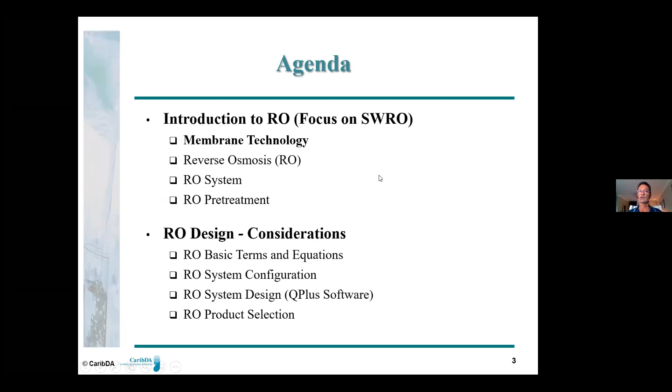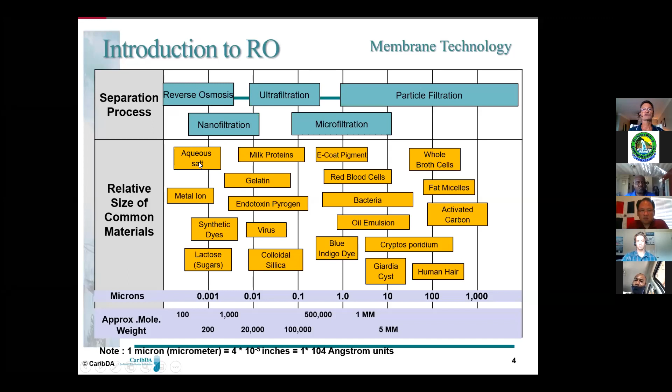This is kind of complicated - I'll just leave it up here for a minute. Not complicated, just has a lot of info on it.

This actually relates to pH. Those of you that run a reverse osmosis system know that your filtered water, called permeate, is low in pH. Part of the reason, I believe, is because carbon dioxide gas passes through the membrane into the permeate water and forms carbonic acid, which makes permeate a little bit acidic. So a lot of governments and users of RO add back some minerals, sometimes calcium or even lime, to raise the pH back up. Some don't, and if you don't, it can be a bit corrosive to your distribution lines.

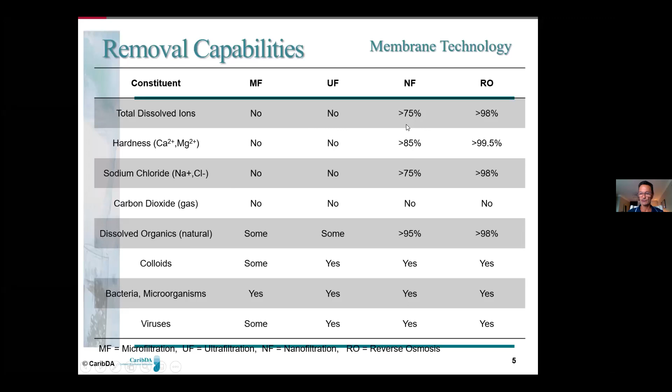Nanofiltration, you don't see a lot. I sometimes hear it called a membrane softener. I do have some customers that have nano in industrial applications. It doesn't take out everything that an RO does, but it takes out a lot of the hardness, a lot of the dissolved solids, and a lot of the salt, the sodium chloride. So it can be used in a lot of applications. It would probably be a bit salty to drink this water, so we're not using it for potable very often, but it has its benefits, and it would use less pressure than an RO.

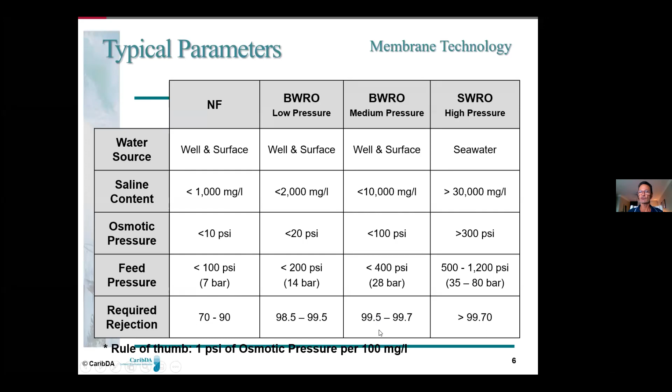As we move up on this scale of higher dissolved solids, we're going to need higher pressure to separate the pure water from the dissolved solids. As a rule of thumb, we need about 1 psi for every 100 milligrams per liter, or parts per million, of dissolved solids. You're going to see that a little more as we go through.

Membranes, you're probably in municipalities, especially in ocean desalination, going to see pretty much the standard membrane, which is 8 inches in diameter and 40 inches long. That's pretty much the standard. There are other sizes out there, but that's what we're going to see in the Caribbean, 8 inches by diameter by 40 inches long. In some smaller applications, primarily industrial, you'll even see 4-inch diameter membranes by 40 inches long, and even 2.5-inch diameter membranes by 40-inch or other lengths. But the standard most of you will see is 8 inches in diameter by 40 inches long.

So what's really going to happen with these membranes installed in our seawater or brackish water RO system: we'll drive feed water through spaces between our membrane sheets, through the spiral, not through the center. The feed water will go right on through and come out as what I called concentrate. But while it's passing through, pure water molecules, H2O molecules, are going to pass through the membrane.

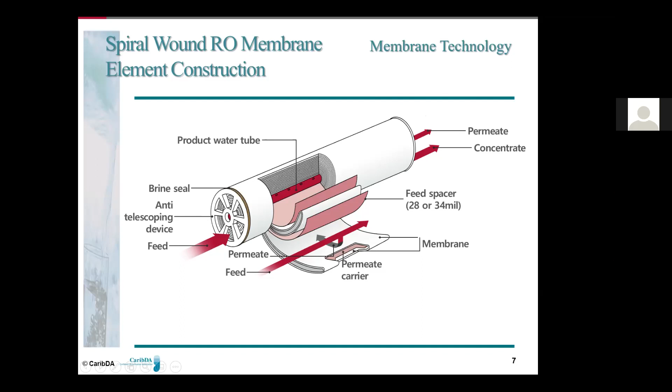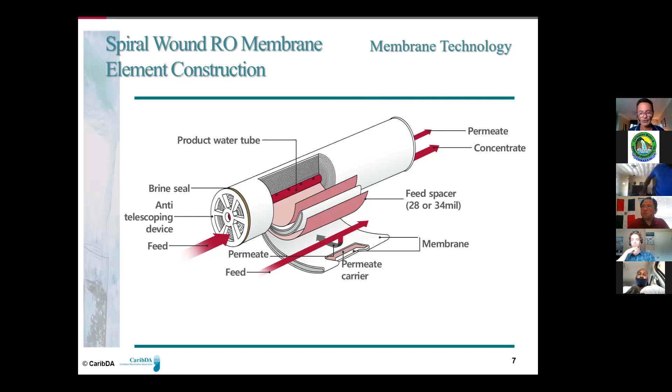Most desal systems for municipal drinking water purposes will have 6 or 7 of these membranes in a pressure vessel. So that last membrane is going to have almost double the dissolved solids of the feed. That's one reason we need higher pressure than the theoretical pressure stated for seawater—because when we get down to that last membrane, we're actually desalinating much higher concentrate water. It might not be totally clear now, but hopefully it becomes clear as we go through the other slides. That's why I said at the get-go, it really pays to see this presentation more than once.

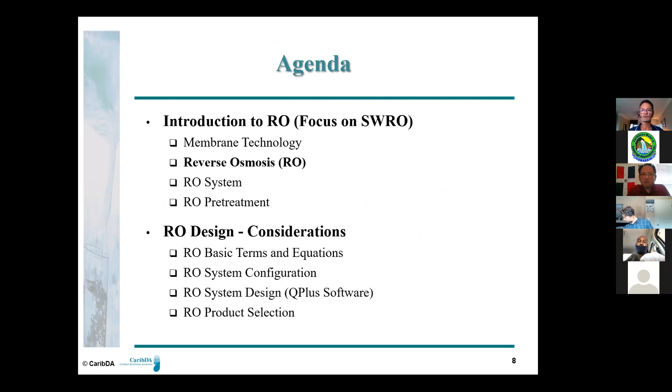Okay, so we're going to look at the RO system itself—actually, we're going to look at the theory of reverse osmosis now. This slide, you could look at a lot of times; sometimes it looks simple, sometimes complicated, and sometimes at first it doesn't make sense, but it is what happens. Here to the left, we've got a diagram illustrating what happens in the natural phenomenon called osmosis. We're here to talk about the technology, reverse osmosis, but it's based on this natural phenomenon called osmosis.

And that is that if I've got a membrane, I hope you can see my little arrow. If I've got a semi-permeable membrane separating two streams, this membrane here would allow, in this case, let's just say it lets water go through, H2O molecules go through, but it doesn't let anything else go through. If I had this membrane, and I had seawater, let's say, or a salt solution on one side and pure water on the other side, and I just let it sit there with no applied pressure, pure water would actually pass in this direction into the seawater side or the salt side. It would not go this way. It would go right to left, the water molecules.

And the reason is the natural phenomenon is that this solution over here will try to naturally equalize with this side in terms of concentration. So it's more concentrated right now than the right side. The only way we can dilute it to be equal would be if we pass more pure water molecules through from the right to the left and start to dilute the salt water or seawater on the left side.

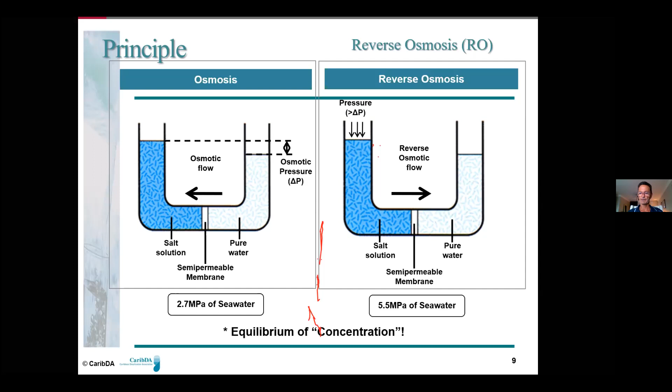I think what's coming next is a little animation that's going to show that, and I'll just rerun it. So this is osmosis, not reverse osmosis. We've got a semi-permeable membrane just sitting there with no pressure on either side. And what's going to happen is fresh water on the right is actually going to pass through to the salty water on the left, trying to equalize the concentrations of the two solutions. I've never seen this particular animation. I really like this one.

Okay, and that pressure that builds up. I didn't point this out so much in the other slides, but you obviously are going to build up a pressure here, right? Because look at the difference in levels here. That is the osmotic pressure. And that's the pressure we need to overcome with a pressure pump if we're going to drive this seawater the other way and make fresh water out of ocean water. Now we're going to see the same animation with reverse osmosis.

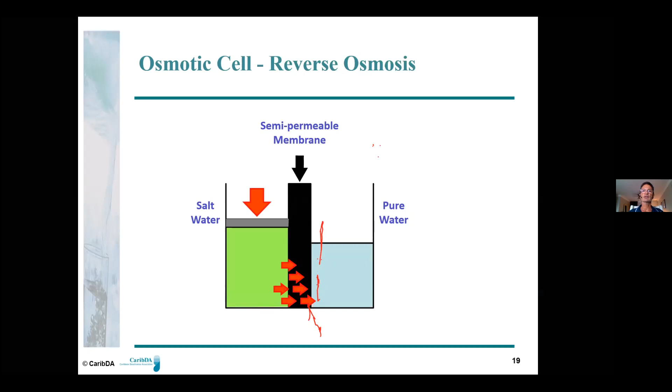Okay, so in this case, we are applying a pressure. That's my big red arrow. So this is a mechanical pressure that we've got to apply with a pump. And we're going to overcome that osmotic pressure, and we're going to force fresh water from our salty solution through the membrane in the opposite direction to create our pure water for drinking or other purposes.

So this water on the right is what you're going to sell to your constituents or supply to your customers to drink or use for whatever other purposes. This concentrate, in the case of ocean desalination, we're just going to pump right back to the ocean. And I think Nate's going to get into it.

This concentration of salt, after we've driven all that we can through a membrane, is about twice the original concentration. So we started out with 30,000 milligrams per liter of dissolved solids in ocean water. Our concentrate is going to probably be 50 or 60,000 milligrams per liter of dissolved solids that we're going to put back to the ocean.

And over here, I think you're going to end up with what I see around the Caribbean, like you don't have zero dissolved solids here. You probably have 300, 400, 500. I don't know if that's microsiemens or parts per million, but you do have some dissolved solids in here, primarily a little bit of salt. So sometimes you might even taste that.

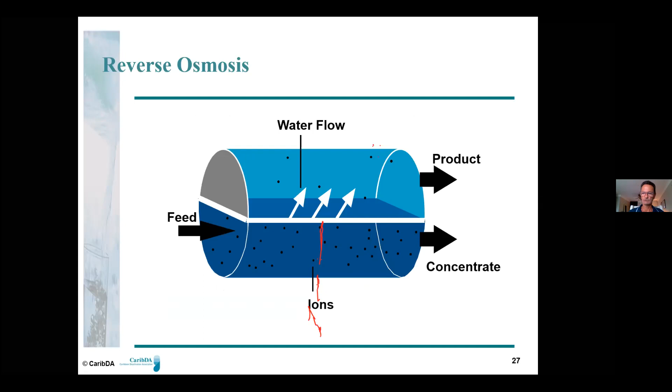Okay, I thought there was going to be a slide that showed us some of the ions, but not. Okay, I guess I should say, any questions so far from anybody? I'll go back on some slides if you want us to. No? Okay. So the next is a little slide about, okay, we're still in RO system.

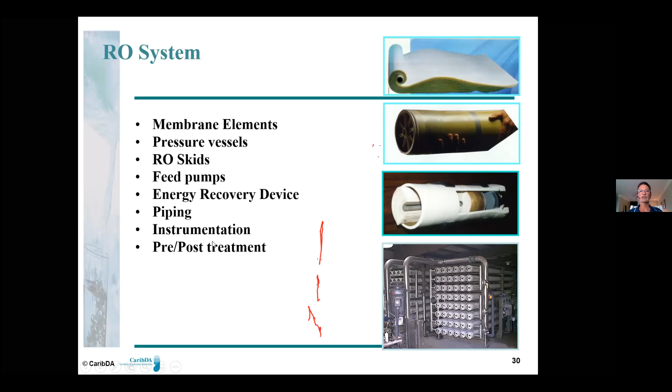And this is really important because if our membrane is so fine that it's going to only allow water molecules to go through and not allow dissolved solids to go through, it certainly cannot handle turbidity and particles or other things like that. So we've got to take all those things out through pre-treatment. If we don't, we'll foul the membranes right away. So pre-treatment can be a number of things. Actual clarifiers.

So those of you that are in surface water, maybe you're running clarifiers or even wastewater. Some of the very large desal systems in the Caribbean and around the world actually use clarifiers to first take out sand, obviously, in seawater and other colloidals that would foul our membrane. So we could use clarification. We almost always have multimedia filters, and like I mentioned earlier, we can have ultrafiltration or even microfiltration, and we almost always have cartridge filters to remove particles before they ever get to our membrane.

And in spite of all that, we often use an anti-scalant so that whatever might be left in the water that's undissolved will flow through the membrane more easily and not foul. So that's on the pre-treatment side. On the post-treatment side, I mentioned that we sometimes post-treat to boost up pH, and calcite really is just calcium carbonate. Calcite's used for that application a lot, and so is caustic soda, sodium hydroxide.

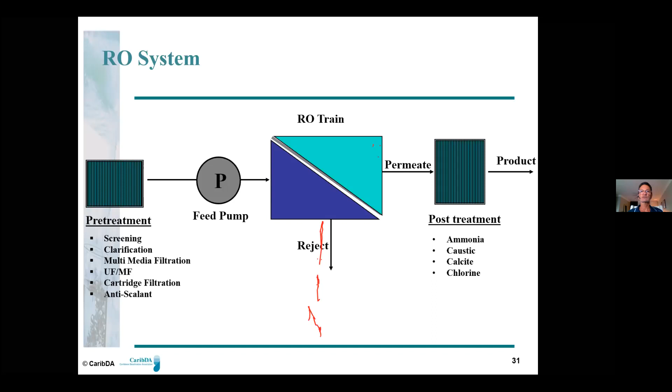Oh, this is important. Membranes, the type most of us use, polyamide membranes, do not tolerate chlorine. Remember, we're adding our chlorine after the membranes, not before. But sometimes we have chlorine in our water. For example, some bottled water companies take city water and run it through reverse osmosis systems to make bottled water. In those cases, we've got to remove the chlorine. If we don't, you will oxidize the membrane, you will open up the pores, and instead of just H2O molecules passing through, some other bad stuff will pass through.

So we do not want any kind of oxidizer on our membranes. We don't want chlorine, we don't want ozone. I've seen people think because ozone's a great disinfectant, some industrial customers might be disinfecting their tanks with ozone and they think they can disinfect their RO, and they will ruin the membranes right away. So you don't want any oxidizers on the membranes.

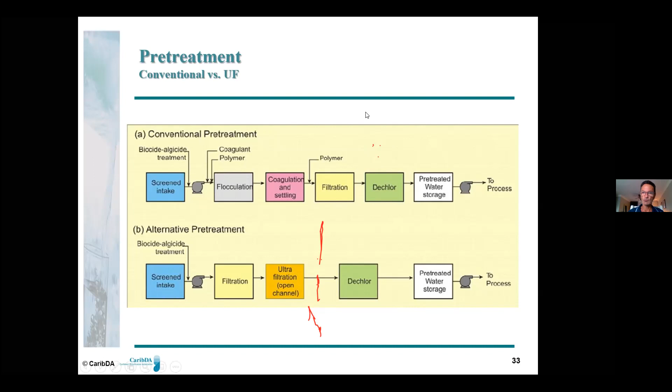Let's keep moving on. This is the slide I thought we had earlier. This is a lot of data here, but I think Ignacio said you're going to get this later, so you can look at it later, and you're welcome to reach us through email, because I don't want to spend too much time. I know there's a lot more slides to go through. So to the right, what I'm showing would be ideal feed water for our RO.

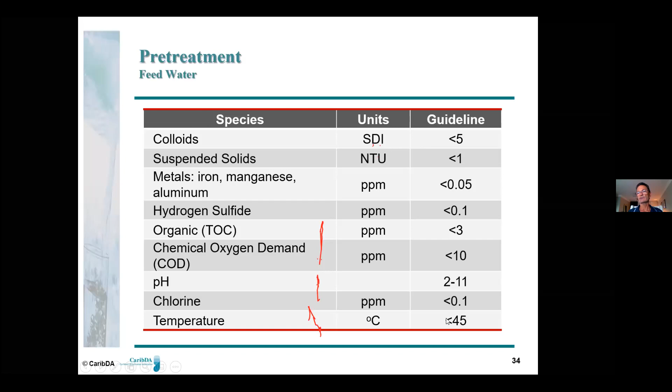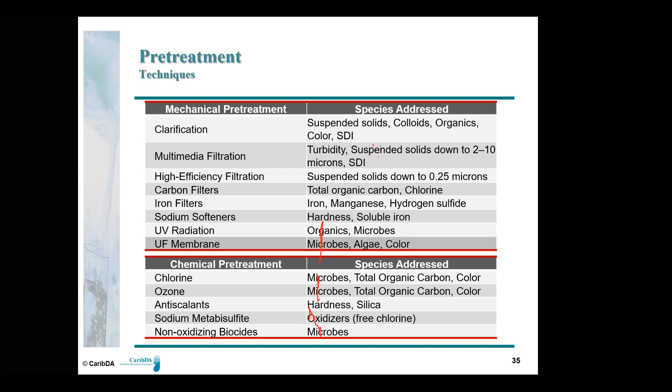This is just more of the same, just in a different format, all about pretreatment. We could do a whole presentation on pretreatment. It is, to me, one of the keys to your RO running really well. You've also got to design your RO system really well. Sometimes the focus is on the RO system and pretreatment is an afterthought, but that could be a problem later because pretreatment is equally important as the correct design of your RO. Because the membrane is so fine, we can't tolerate things that would foul it. We want them to come out before the membrane separates water molecules from dissolved solids. So I won't dwell on this.

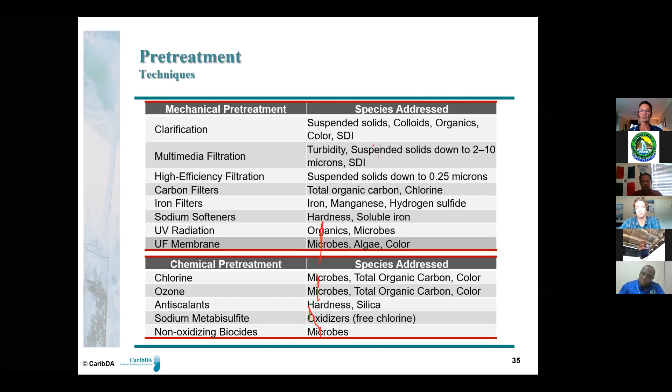You could look at that later when the presentations come out back to you. I think that's my part.

So I think we're going to have Nate next. Now his presentation gets pretty technical, so don't be disappointed if some of it seems like going back to school. Why do you have to learn some of this stuff? But it's really like doing math in high school - you say you'll never use this, and you find out you do use it. No quiz at the end though. It's really, really worthwhile. There's Nate.

A lot of times your suppliers do this for you. The builder of your RO does this for you. Your membrane guys like Nate and Jess, they'll do all this for you. They're going to run through a lot of these calculations and math for you, but it really helps to understand it. It actually helps you run your system better, in my opinion.

So again, this is some of your first time seeing it. I've looked at his slides - they're pretty technical, but you can ask questions later at the end of this or through emails, and we'd be happy to help you.

Okay, so I'm going to hand over to Nate. Nate, I don't know, you control the presentation from there? I was thinking you've got control, so I can just give you a thumbs up on screen when you need to progress slides. Very good. Does that sound good? Yes.

So just going to introduce myself real quick. Like Jerry mentioned before, my name is Nate Weeks. I'm an application engineer with LG Chem, and we're a membrane manufacturer. My responsibility is to support the sales team. I perform membrane projections and customer trainings, and we also work on new product development, manage pilot studies, and do some forward-looking data analysis to forecast new products and see how we're performing. So I'm going to go through some factors influencing RO design today, starting with some basic terms, system configuration, talk a little bit about our software, and then product selection.

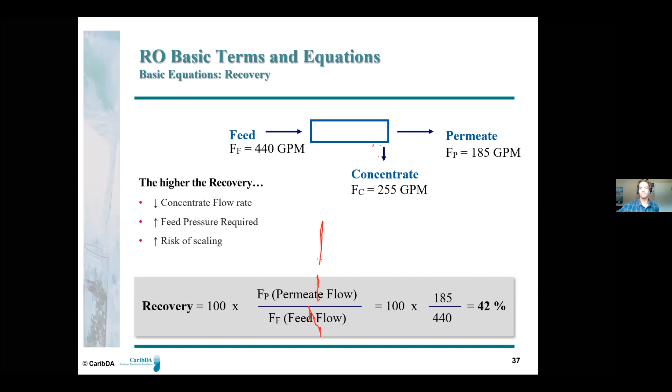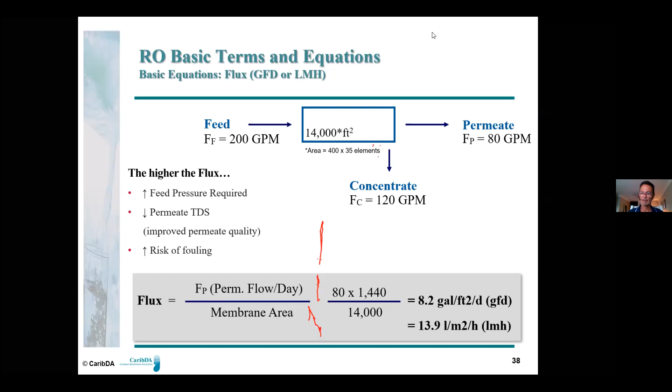Let me see here. For some reason I'm not changing, the slide's not changing. Let me see here. There we go, all right, here we go.

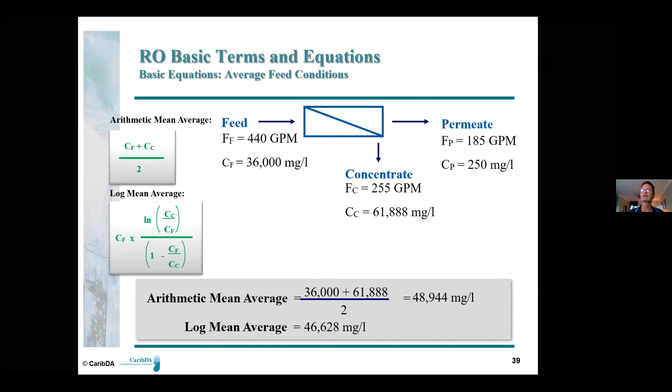For some reason, it takes me a bit here to change it. Hold on. No worries. There we go.

So here's some terms that we're going to refer to a couple times in describing how an RO element functions and how a system functions as well. It's a good thing to have a handle on and be able to do quick calculator math with when you're doing system design.

Salt passage and rejection are expressed as percentages of TDS that are removed by the RO process. You divide permeate TDS by feed TDS to get salt passage, the amount of salt making it through that RO element. As Jerry mentioned, it's a very fine filter, but in a seawater application with 30,000 ppm TDS, you might get 300 to 500 ppm through. That's still several orders of magnitude of removal, but it might not be good enough for a certain client.

So we need metrics for this removal, and that's why we calculate salt passage. Salt rejection is just expressed as a percentage, 100 minus this value.

Salt rejection can be expressed at a system level, so the total amount in your permeate as a combined header versus the total amount in your feed, a simple percentage of that. But we also use it as an attribute for a membrane itself. A membrane is tested after we manufacture it, and that individual element has a salt rejection and a flow. When it's at scale, the rejection is different because it's repeated many times with different feed conditions within the system, depending on if it's a lead element in a pressure vessel or a tail element. So it's a matter of scale, but we use these terms, salt passage and rejection, to describe both system performance and membrane performance.

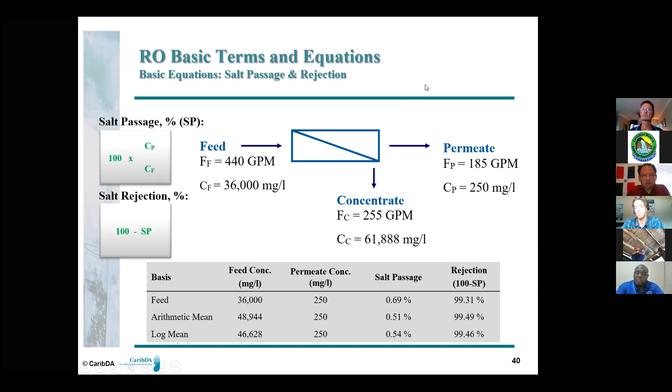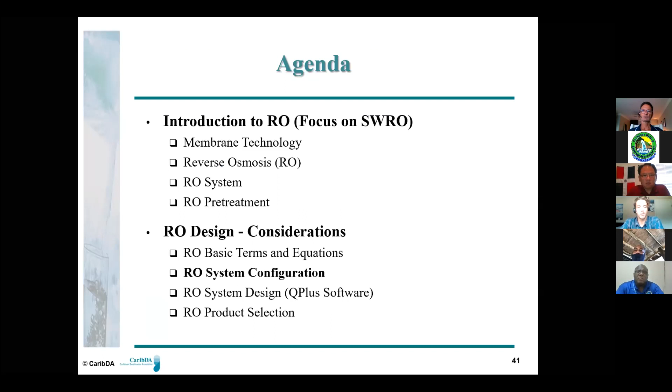Is that the right slide there, Nate? Yep.

Okay, so we're going to move on to configuration now, a little bit more about how we put together an RO system. The simplest array for an RO is single pass, single stage, and pressure vessels will be arranged in parallel, all fed from a common header, as you can see here. The number of vessels depends on the production capacity, but it also determines the average flux, and therefore depends on the characteristics of the feed water, like we were talking about earlier. Permeate and concentrate from each vessel are collected in a common header, and the typical maximum recovery of this arrangement is 50% or less.

Something I want to touch on before we move on: you may commonly see pressure vessels that are 6 or 7 elements long. We work with pressure vessels all the way from 1 to 8 long, and recovery of a system is largely dependent upon the length of the pressure vessel as well, because it determines how salty the feed water is going to be in that tail element.

So you might be able to squeeze another 5% recovery out of a single pass, single stage system if you have 7 element long pressure vessels instead of 6 or 5. These are not hard, fast rules, which is why we use projection software, because each system is a little bit different. There are so many factors influencing whether something is well designed or not.

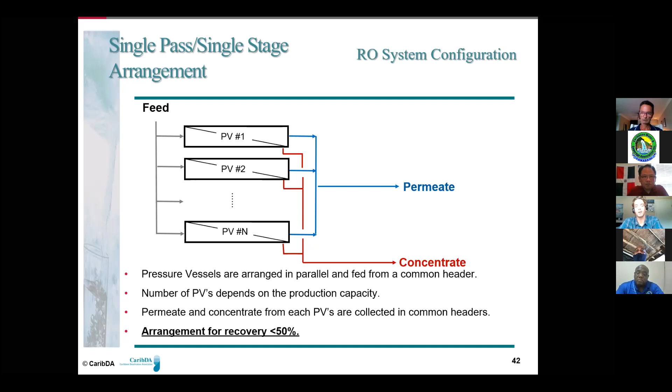Okay, so a multiple stage arrangement is a way to increase recovery by sending concentrate from one bank of pressure vessels to feed a second set. This is a type of design that can maximize system recovery while tailoring permeate quality.

This is very typical in brackish water applications, where 2 to 3 stage designs can help achieve 75 to 85% recovery. It's less common in seawater applications because you're dealing with very high salinity, and often the industry standard is about 45% recovery. But in many seawater applications, a 2-stage design with an interstage boost pump can get up to 55 or 65% recovery.

And in this case, permeate from all stages is once again combined into a common header. Something I want to touch on about the seawater application with an interstage boost pump is, in this case, we're dealing with aggregate concentrate from the first stage for a seawater application. So like Jerry mentioned, it's going to be scaled up from, let's say, 35,000 ppm to 70 to 75,000 ppm.

Because of the recovery being 45 to 50%, you have to think all of that salt is going to be cycled up and expelled to the second stage. So the booster pump helps add additional pressure for that second stage to overcome that difference in salinity and balance the flux across the two stages.

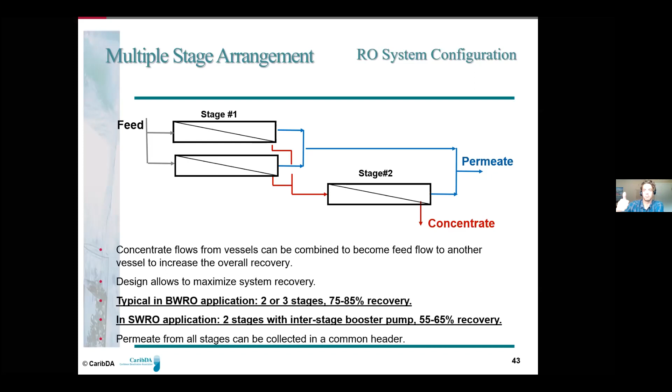In order to improve water quality, permeate flow from a bank of vessels can be fed to a second bank or pass. This lowers overall system recovery, but in a lot of applications it's essential to achieve the necessary product quality. In seawater applications, two-pass systems typically provide less than 50 ppm TDS and boron less than 1 ppm. This allows for pH adjustment between passes as well.

That's done in order to improve boron rejection, which is something we see a lot in seawater applications in, say, the Middle East or the Mediterranean. Oftentimes the second pass will treat all of the first pass permeate, but we can also use a split to treat only part of that permeate. So you can put in a tee and send some of it around and blend it to create whatever product quality is required. That also changes the size of the second pass. It's a really customizable thing, another variable that we play with to tailor-make the water depending on our client's needs.

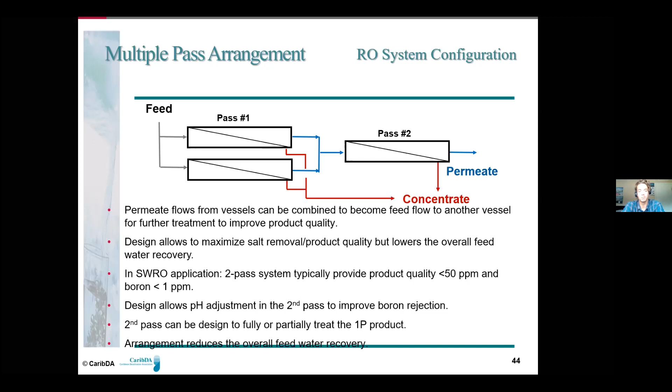The percentage can be changed using various throttling techniques. It's very customizable. You can change it based on time of year and water temperature, and it helps you save energy, reduce the size of the second pass if necessary, and get the right quality of water for the right application. Something essential to consider in a case like this is fouling, because you are relying heavily on your lead element to produce high quality water. So you need a really dialed-in pretreatment for a system like this.

Hey, Nate, if I could just interject here. I don't know if some of the guys online can corroborate this, but I've seen in the Caribbean, and you've probably seen around the world, that a lot of users take their tail membranes and move them to the front, rotating the membranes for the reasons you're mentioning. Their lead membranes are getting heavily fouled, so they rotate membranes through and maybe even dispose of the lead membranes. Yeah, that's quite common. That's a good practice as well.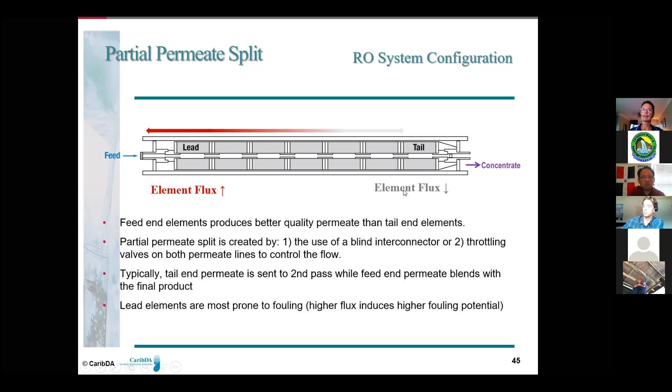But so often what we see in some brackish systems that are a single pass is we can recirculate concentrate from the first pass back into the feed in order to increase recovery. And that will actually increase the salinity of the first pass feed water. And so only a small percentage of your first pass concentrate can be recycled. Otherwise you risk increasing it to a harmful degree or to a degree that's not technically feasible.

But in a two-pass application, it almost behooves the designer to include second pass recirculation because you're leaving water on the table that's really good quality. For example, you're going to have pass one permeate that's 300 ppm, and you have pass one feed that's 30,000, and you'll have pass two concentrate that's 600 or 700. It's doing you nothing but good to bring that back into the feed and inject it, and then dilute your pass one feed stream.

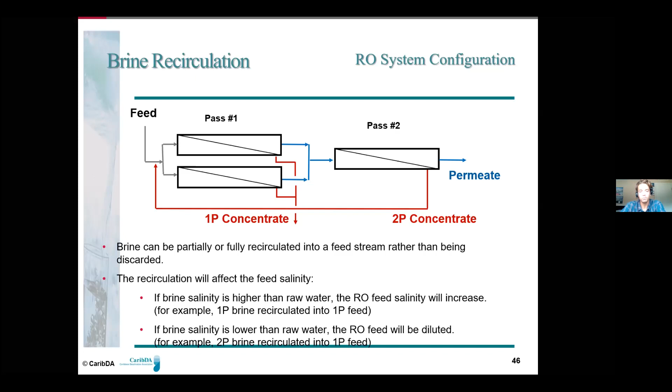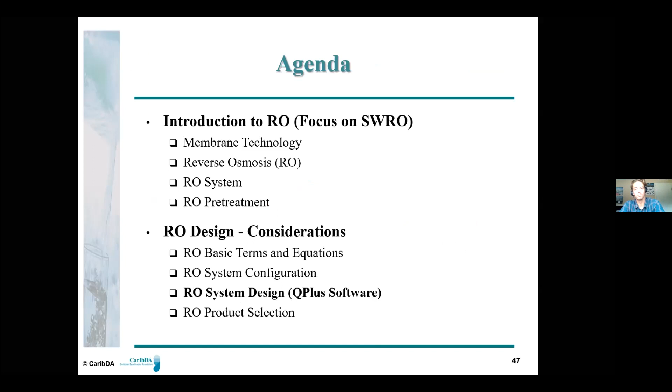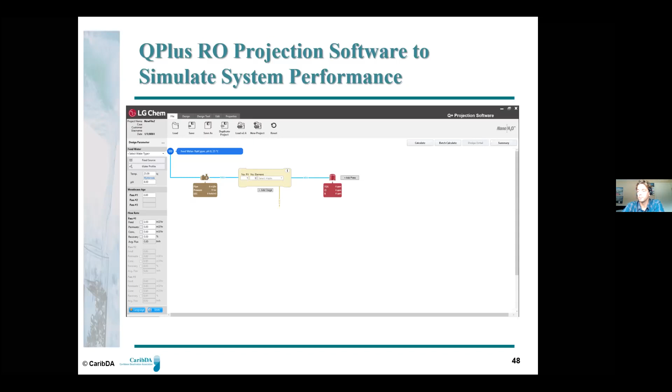So as we mentioned before, feed salinity increases as the feed water moves through the pressure vessel. For this reason, flux decreases for each element in the series. So if we have a higher salinity for each element in the pressure vessel, then it's going to require additional pressure to push that water through. And so we have a decrease in flux from lead to the tail position. Now, good design will have a balanced flux as much as possible, since high flux can accelerate fouling. So we want to make sure that it's all moderate, to alleviate any fouling risk.

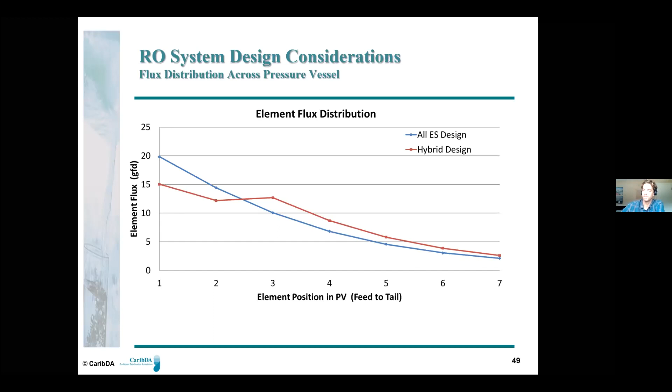So what we'll do if we have a request from a client is we'll put together multiple options, and we want to optimize where the water quality is sitting. With a margin of error, we want to cut it close to that requirement and not provide water that's too pure for your needs, because then we're using excess feed pressure. So we want to optimize how much energy we're spending to make just the quality of the water we need.

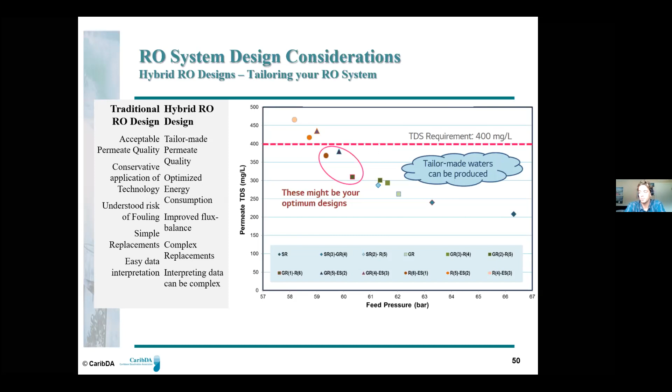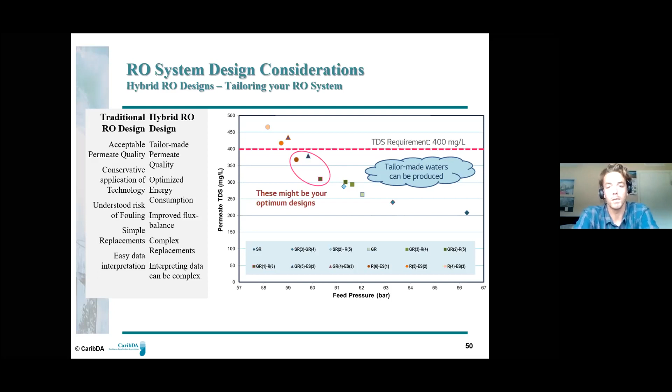And I will add that hybrids in seawater usually mix elements within a pressure vessel, but in brackish water, we'll use hybrid designs sometimes. Typically, the elements in one pressure vessel will be the same, and then we might use a different element type in the second stage. That's more of a balancing flux type thing. We might use a high rejection, low flow element in the first stage, and then a higher flow, low energy element in the second stage. Just a design option that we might use.

Okay, Nate, I don't know if you're going to get into more product selection of LG membranes here, right? So what's coming next? Yeah, this is the next slide. Yep. So in all fairness, LG's here, and thanks for their time and their input.

When you saw what Nate showed in terms of software, I guess all membrane manufacturers have a software. I do have to say though, the LG is easy to use. But you can get those softwares from any manufacturer. You may have LG membranes, you may have Dow, you may have Hydranautics, and they look overwhelming when you first get them, because I play with them. But when you get in there and dig into them, they are really interesting, and you do learn a lot.

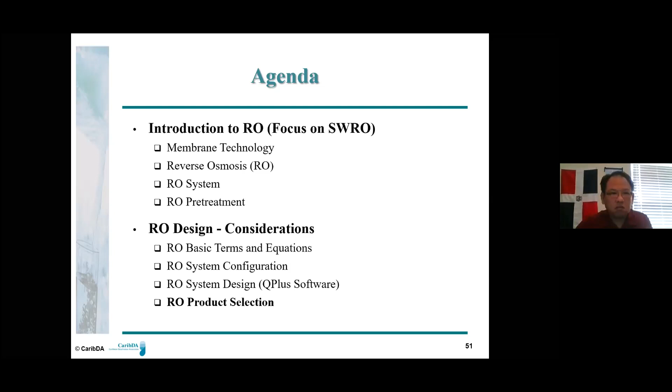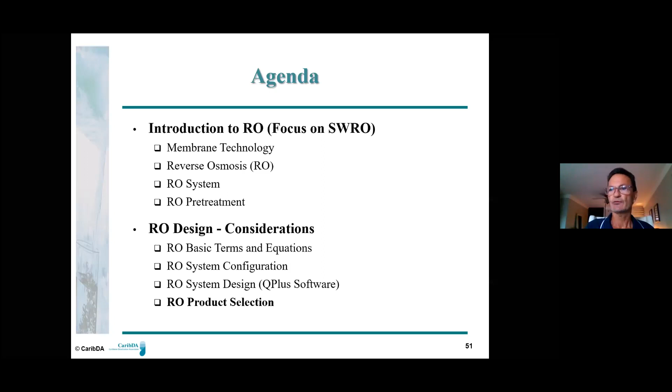What Nate was just talking about is mixing different models within a pressure vessel, within a system. That also works. I think he's going to get into now, but I'm going to ask you, Nate, to go through it pretty quickly, a little bit more about the product line of LG. In all fairness, they are a great membrane producer, but there are others out there as well. So we'll move forward.

Yeah, so what we've got here is not the entire range of elements we have available. This is just the nomenclature that we use, so you can familiarize yourself with it. I'm going to interrupt again. I think this is very useful because in your membranes, you're going to see these things and maybe you didn't know what they meant before, but SW and BW, most manufacturers use that. That's just designating a seawater or a brackish water membrane.

In the case of LG over here on the right, we've got ES, that's energy saving. Dow, I think, calls it LE, low energy. So there is information in the product name of the membrane. Nate is showing his, but your other brands are the same, almost all of them. Hydranautics, not so much. I never understood CPA and all that. But with Dow certainly, part of the name tells you what the membrane does, and same thing with LG.

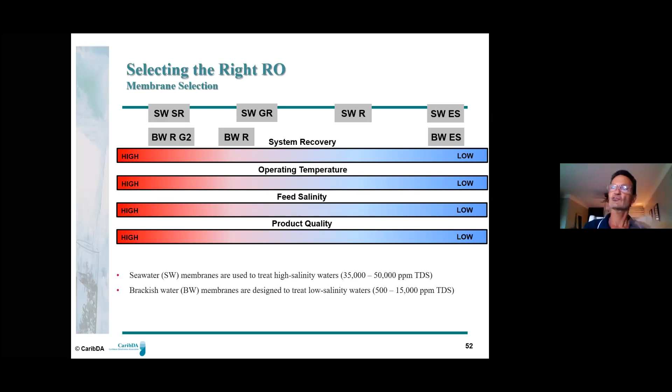Go ahead, Nate. Yeah, so like Jerry was saying, this is not our entire product line, but this is a little bit about the nomenclature and where we place it on this high to low spectrum for a couple of these parameters. Mostly this is referring to feed salinity and product quality. So we've got seawater ES and BWES. That's energy saving. Those are our high flow, low rejection elements. We've got seawater R. The R is just for rejection. That's our flagship seawater model.

And then we've got seawater GR, which is great rejection, and seawater SR, which is superior rejection. Those are our lower flow, higher rejection elements, and we use those sometimes in a single pass or something with critical boron rejection. Those are going to be your higher pressure applications. On the brackish side, we've got BWR, our higher rejection brackish element, and our recently released BWR-G2, which is seeing a lot of installation recently. It's the next generation, with higher flow and higher rejection.

Something that's not mentioned here because they don't really fall on this spectrum of low to high rejection and flow, is we also have a fouling resistant BWAFR, which has a coating on the element for use in high fouling applications. So if you have higher SDI or you're in a wastewater application. It also only comes in a 400 square foot variant with a thicker fouling resistant spacer.

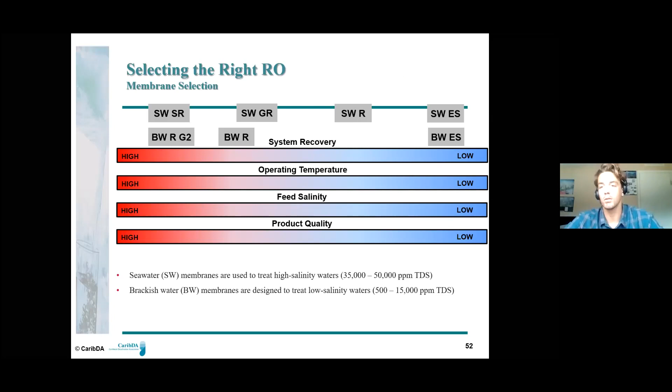But yeah, again, typically we'll go into the catalog more in depth if we do software training with clients. I don't want to take up too much time. This is the last slide I have, but yeah, just giving you a little bit of a taste of what we have on offer. And there's almost limitless combinations of what you can do with projection software and with all the models we offer. So we're always here to help, and obviously here now to answer questions.